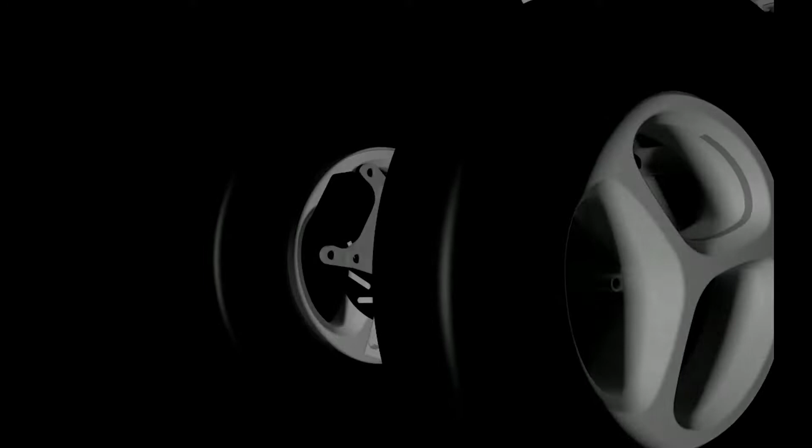Before we start, I would like to introduce what kind of personal mobility we tried to design. The target mobility should include 3 points: for active seniors in China, used in a first and last mile condition, as a personal mobility. The following presentation will be about how the industrial design team met these points in the actual design.

The concept of Purion Plus was all based on active seniors in China. Research with the customer insight team revealed that the activeness of seniors is pretty much restrained, and that they prefer something classic, not too iconic. They still have the desire to look cool and young.

They still have the desire to look cool and young, or the pure passion that Purion reflects, but at the same time it should be safe.

By making a positioning map for styling, we concluded that as the design form gets closer to classic, the vehicle becomes more stable than the iconic form. This indicates that the styling strategy of the industrial design team has to focus on restraining the form more than before.

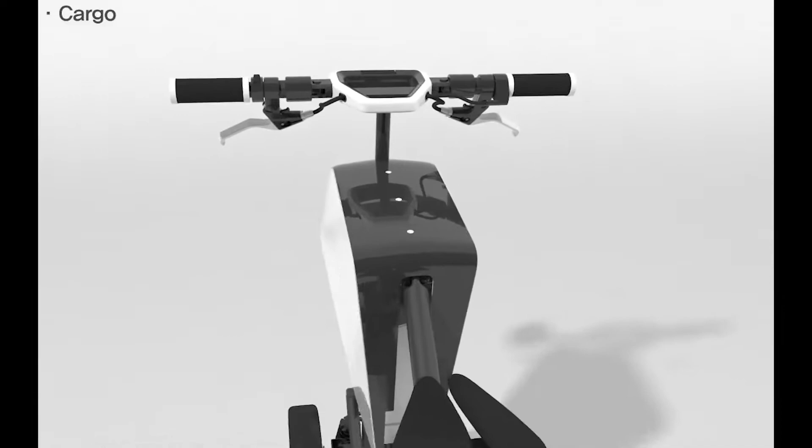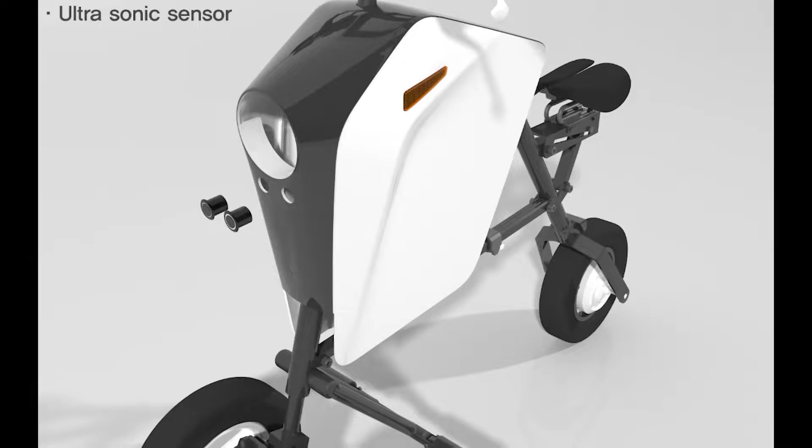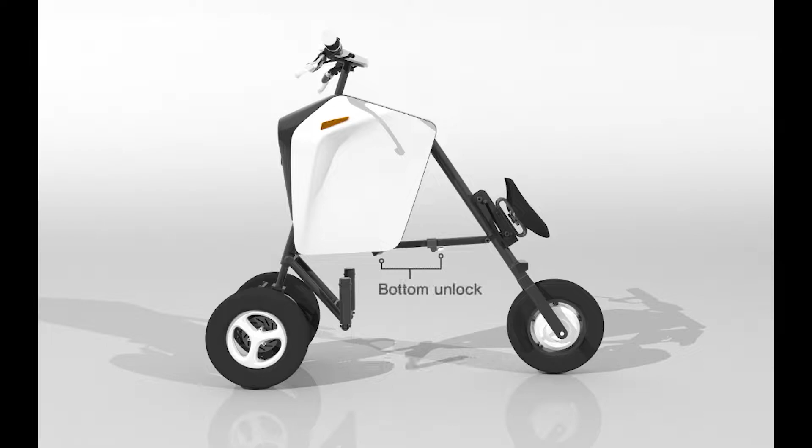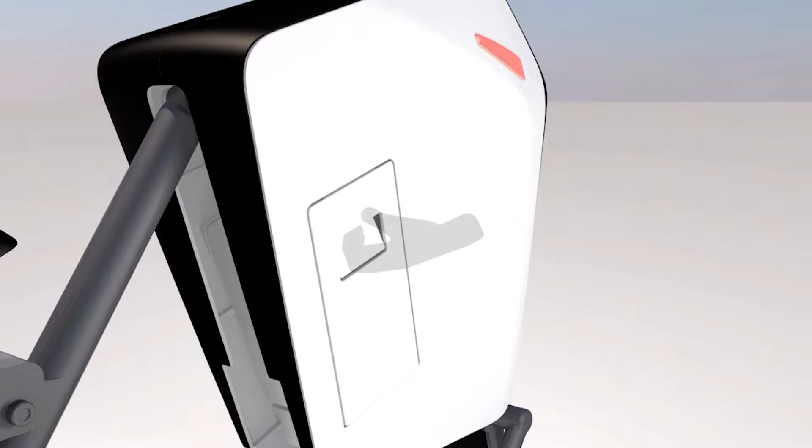Purion Plus is compact but functional. Its frame folds into half, and the cowl wraps its frame. It has a cargo on its right side. According to research by the customer insight team, it was revealed that customers usually felt the necessity of a cargo.

When folded, users can tow the mobility with the towing handle. The ergonomically designed towing handle makes the mobility portable.

Purion Plus is not just a mobility, it's a mobility for seniors. Therefore, in the instrument panel and the saddle, where the users directly meet with the vehicle, it should be ergonomically designed. In a busy traffic situation, users with degrading senses will feel that relying only on sight for acquiring driving information, such as navigation information, is pretty difficult and dangerous. Users will have to continuously look up and down to see the direction.

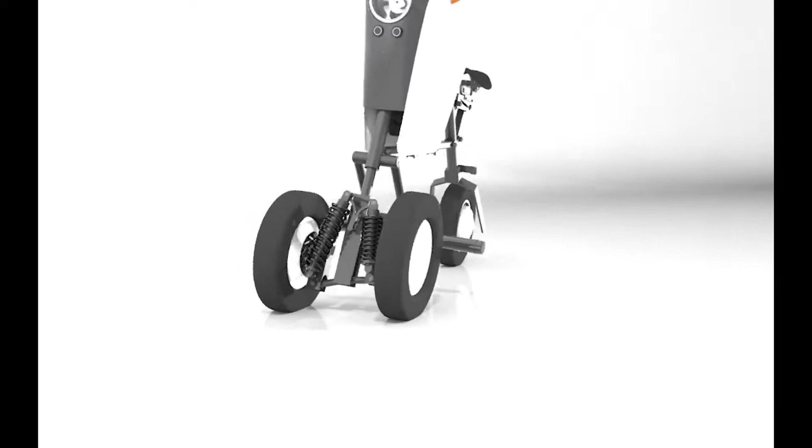Good afternoon, this is Ashley Cho presenting on behalf of Product Engineering of PACE Team 4. For the past few months, we have been collaborating as a team to enhance the specifications of Purion to Purion Plus in the aspect of engineering. Today, we would like to share what we have been working on with all of you. The contents are as follows.

First, the ergonomics. In the process of designing Purion Plus, the first thing we considered was setting the H point and finding an appropriate riding posture for users to feel comfortable. Therefore, we decided to do a mounting test on active seniors using a mock-up made based on the design dimensions. Video, please.

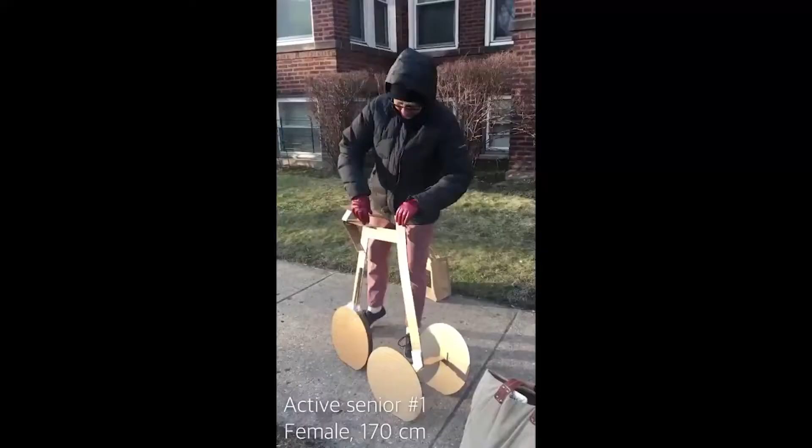The first mounting test was done by Northwestern University with the initial saddle height of 700 millimeters. However, all participants felt difficulties mounting onto the vehicle, so we decided to do another mounting test with modified dimensions of 560 millimeters. The results were satisfying, as all participants were able to mount onto the vehicle without needing to raise their legs above their waist.

The following products have successfully satisfied the given requirements, and they have been tested several times through sets of vehicle performance analysis.

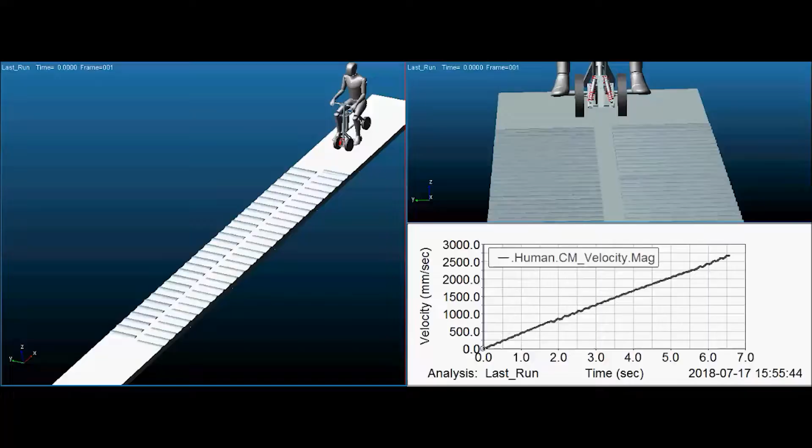Video, please. In the given conditions, we first did a ride analysis on a pocket road. As you can see in the video, we modeled the roads given by using Siemens NX and did a simulation using MSC Adams. With the damping constant set, the magnitude of the acceleration at the human center of gravity was measured to be at its lowest value when the spring stiffness was set to 250 pounds per inch.

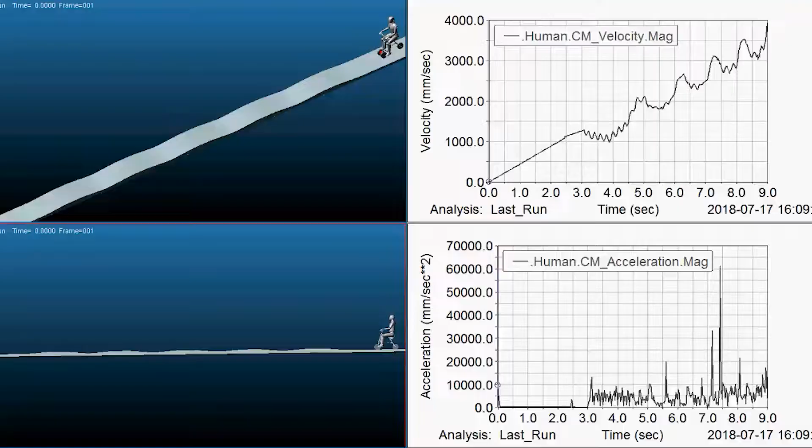Similarly, another set of analysis was done on slope roads with the equivalent spring stiffness of 250 pounds per inch. In such conditions, the magnitude of the acceleration at the human center of gravity was measured to be 6,222.3 millimeters per second squared.

Taking the result of case 1 into further analysis, we have then calculated the time required to complete one single driving scenario given by the PEMD road test.

By using the tread length of 300 millimeters, approximately 10 minutes was required to finish a single driving scenario, which definitely satisfies the given lap time given by the PEMD road test.

Last of all, as our host has greatly explained in the very beginning of our presentation, Team 4 has addressed an issue of the initial folding mechanism of year 1, and therefore we decided to move forward with another folding mechanism.

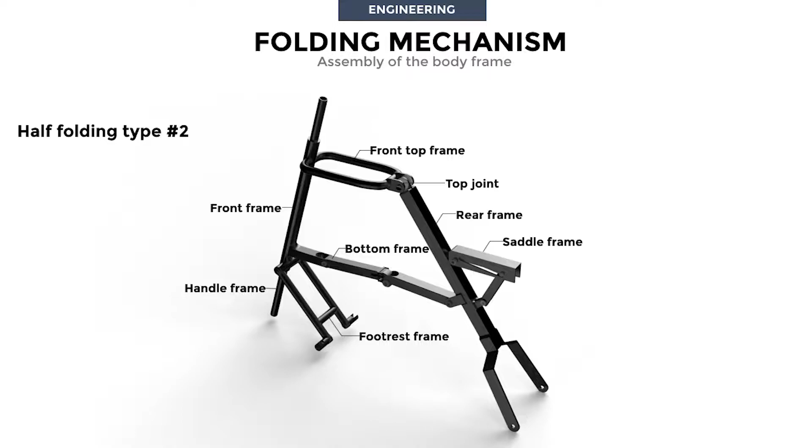Hello, this is Celine representing Northwestern University. The second design of the half-folding type relies solely on the bottom frame to be responsible for the mechanism, which means that it's also entirely responsible for the locking of the vehicle in riding mode. It is composed of 2 bottom frames for front and rear, a spring plate, sleeve, locking pin, and a cable.

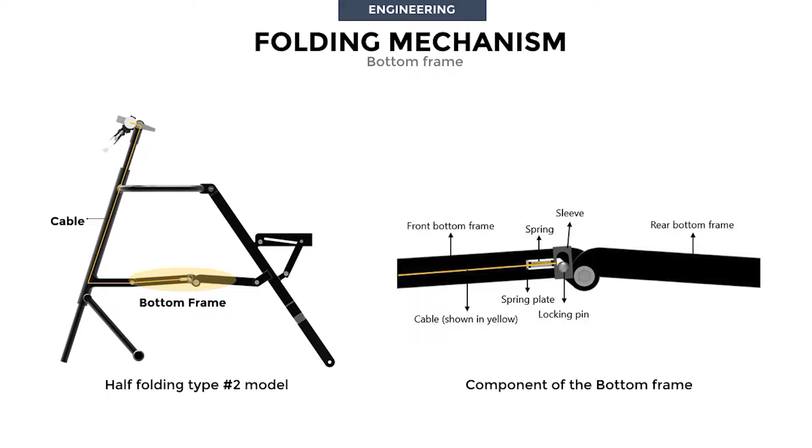The cable originates at the handlebars, runs through the front frame, and attaches to the sleeve. The design utilizes cable activation to disengage a pin from the locking mechanism, which allows the bottom frames to rotate and fold upwards. As you can see in this video, the travel of the cable caused by the folding of the handlebars pulls on the sleeve that moves the pin along a slot and out of the lock.

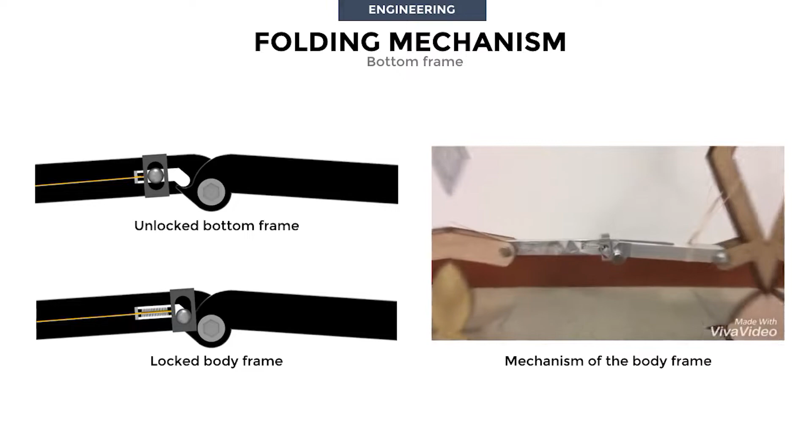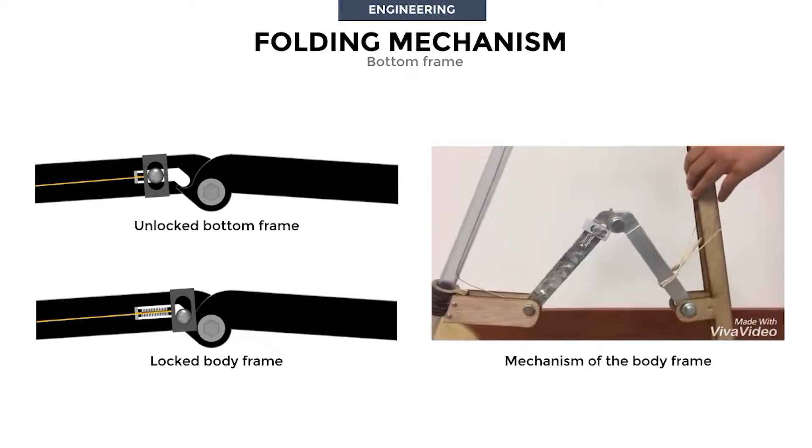The lock is simply a hook that is prevented from rotating upwards when the pin is engaged, blocking its free movement. To relock, the handlebars are returned to their extended position, which loosens the cable and allows the pin to be returned to its locked position by way of a spring pushing on the sleeve.

When you turn the handlebars, the cable is not pulled. But when you twist the handlebars like this, it is.

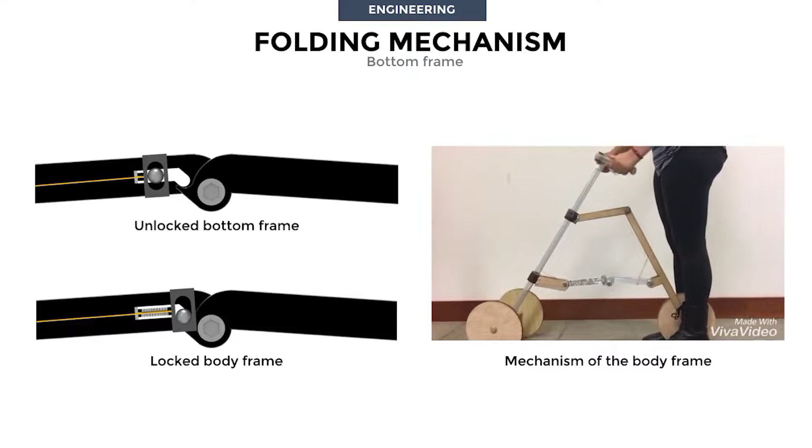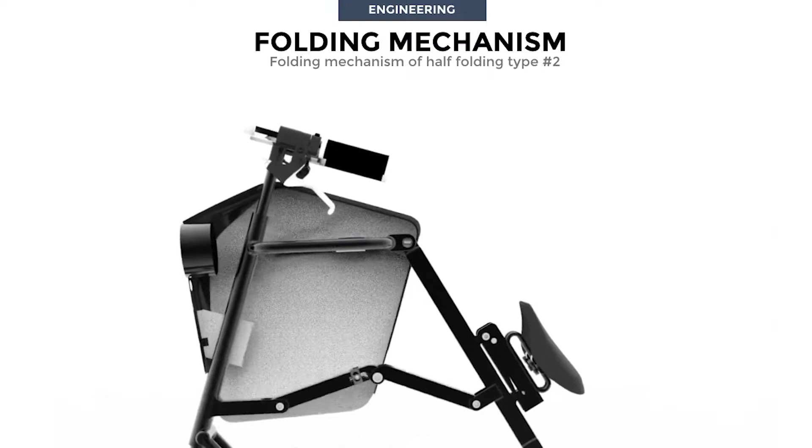Again, from the user's perspective, as seen in the animation, the user first folds the handlebars, which disengages the pin from the hook and allows the bottom beam to rotate. To change it back to riding mode, the user extends the vehicle and then extends the handlebars, allowing the hook and the pin to be engaged again.

The rationale behind this design was that, first, it is the joint that withstands the fewest directly applied loads and moments. The lock is designed to withstand 100% of the externally applied forces with a safety factor of 2, the industry standard. Second, because our target audience is older adults, we avoided placing user touchpoints that required uncomfortable movements, such as bending over or balancing on one foot. Handlebars are an easy location for users to access, as it's the highest point of the vehicle and where the hands are naturally placed. Cable activation was the mechanism that allowed the lock activation to be distant from the location of locking.

I'm very sorry for the inconvenience.

We've also collaborated with Tuskegee University regarding the structure analysis of the body frame. Hadia from Tuskegee will take over and present. Thank you.

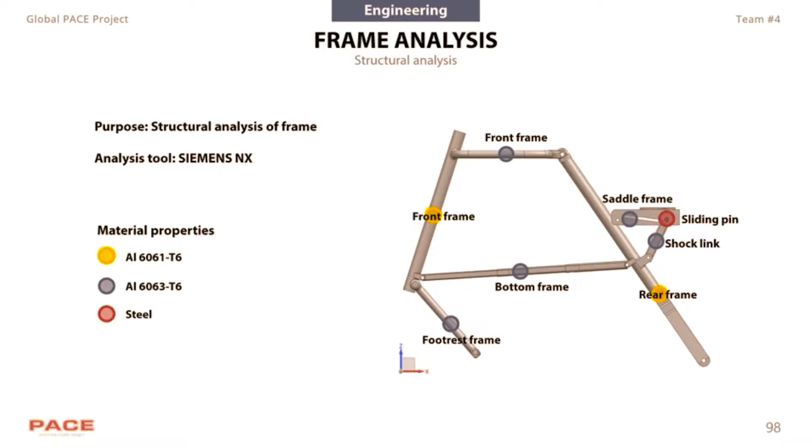We have distributed the total weight of a user of 95 kilograms in a ratio of 1:4 to the footrest and the saddle, respectively. By multiplying them with a safety factor of 3, we have applied the obtained load values of 2,234.4 newtons on the saddle and 558.6 newtons on the footrest. The loading conditions are indicated using red arrows in the presentation. To obtain a more accurate result, we have constrained the movement of the frames.

First of all, to regions indicated using blue arrows, we have applied a pin constraint, limiting the freedom of any translational motion. Also, a simple support constraint was applied to the front and rear frame, which is required to support the model's load. Additionally to the constraints, we have also applied a surface-to-surface gluing contact condition to the meshes in the yellow regions to join dissimilar meshes and enhance the results of the analysis.

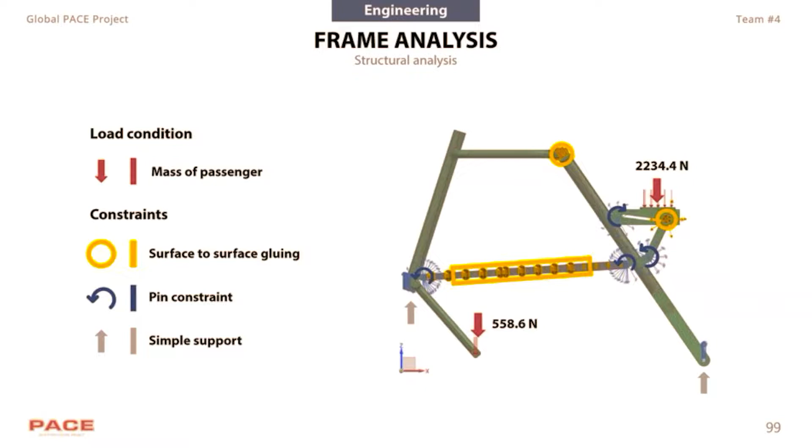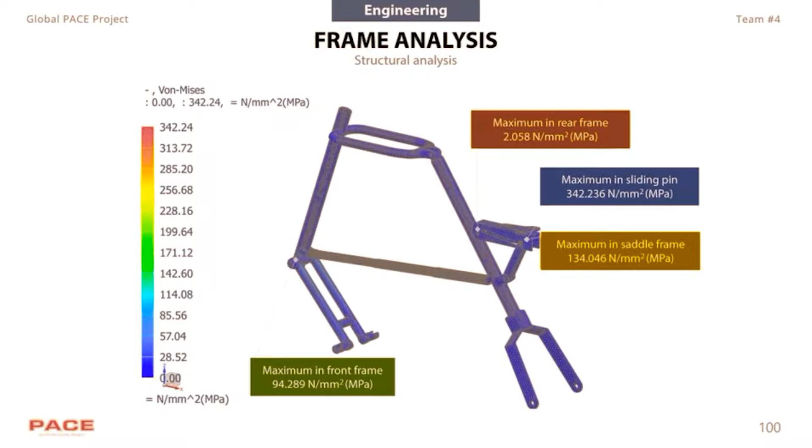This is the analysis result of the entire frame. The graph shows the maximum stress in each frame. For aluminum 6061, the maximum stress value of 94.289 megapascal occurred on the front frame. For aluminum 6063, the maximum of 134 megapascal occurred on the saddle frame, and for steel, the maximum of 342.2 megapascal was obtained in the sliding pin. However, since the yielding stress values of each material are higher than the obtained maximum stress values, no modification was required. As the analysis results suggest, we have concluded that no additional modification is needed in terms of improving the safety of the frame structure.

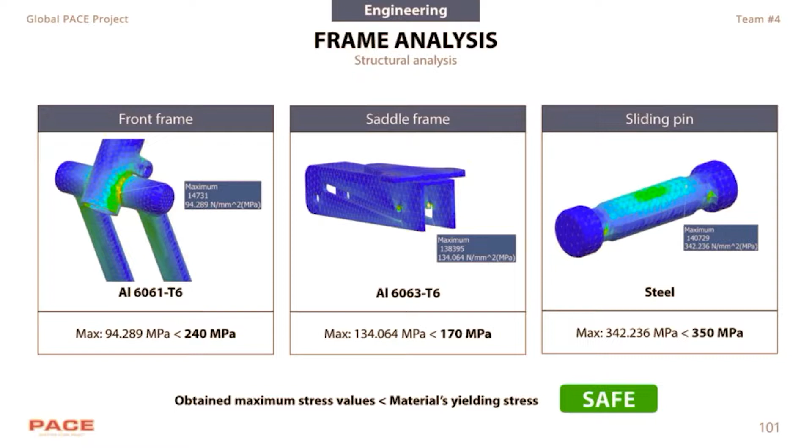This is Wang Bo-fan from Jilin University, and here is the thermal analysis of the battery set. In order to prevent battery degradation and reduce the possibility of battery safety issues, we have conducted a thermal analysis on the battery set to check if it's generating heat within safe range during charge and discharge. We have assumed the cylindrical area as our calculation area in accordance with the layout of the battery on the vehicle.

We have considered 2 cases of charging and discharging process. Considering that we have selected the general working condition of the battery pack on the e-bike, the following are the factors that will affect the heat generated inside the battery: first, the current, the charging and discharging current; second, the internal resistance of the batteries; and third, the room temperature.

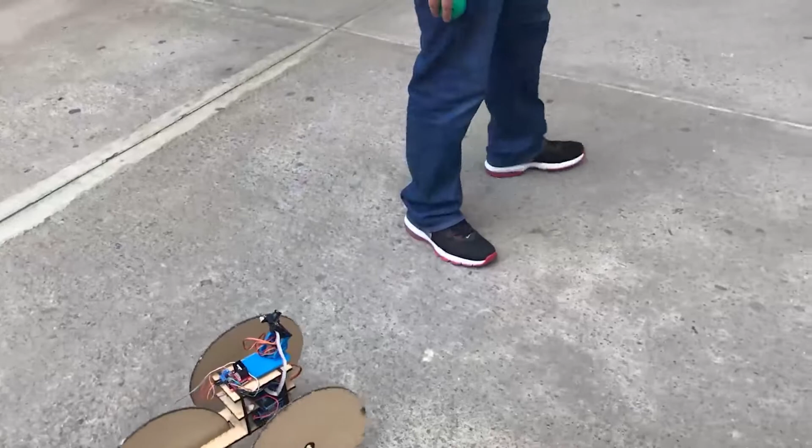We made a small mock-up to test the behavior of the system. The video, please. Okay, we can see our object to track is the green ball. We can see even with green in the surroundings, the camera only follows the ball.

And in the second video, you can see the collision avoidance system. Before crashing, it goes backwards.

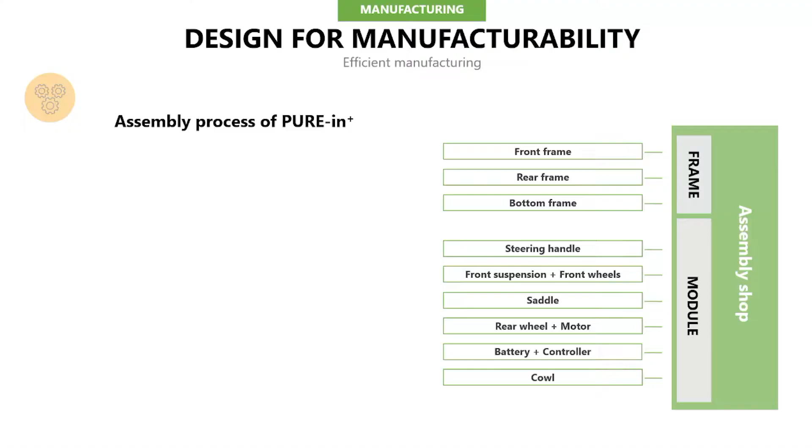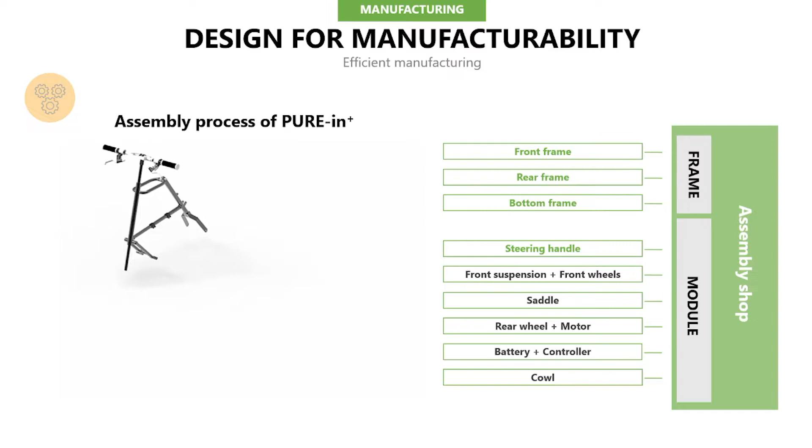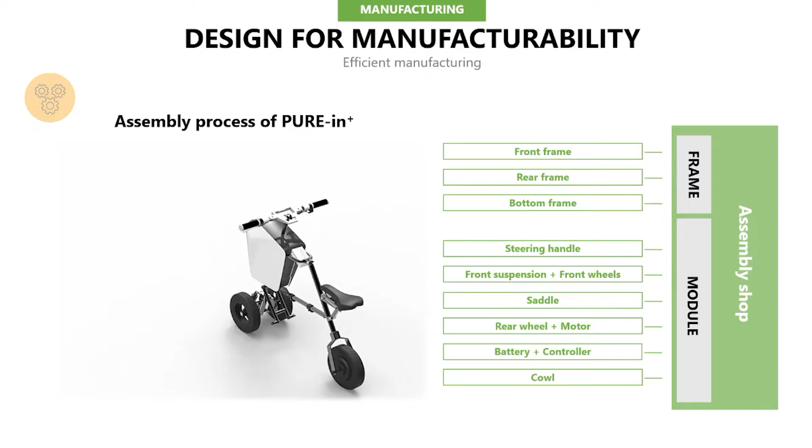Also, through sharing integrated product, process, and results information, all stages in the product lifecycle can share accurate information, not just isolated data of each stage.

Second is design for built-in safety. 60% of occupational diseases can be traced back to musculoskeletal disorders. A combination of physical and psychological factors induces the disorders. From a physical standpoint, the chairless chair which supports the worker's lower body, the exovest which supports the upper body, and the automatic adjustable height control system can prevent work-related injuries.

From a psychological standpoint, the working account system, health program, and eco-friendly workspace will provide a reduction of stress in the work environment. The industrial safety applications provide guidelines for a variety of risks and sound an alarm when workers go out of the safe zone. As a result, workers can always be aware of their safety.

Third is design for the environment. We will place the ion exchange scrubber next to the paint shop to realize green production. It has high efficiency, removing more than 95% of harmful gases while eliminating other emissions and reducing water and power consumption by up to 99% and 75% respectively.

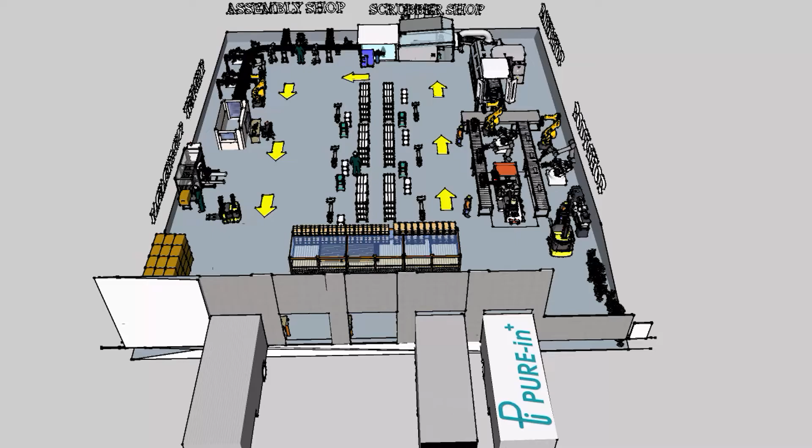This is our PURE-in Plus. As you can see, our plant is a U-structure process arrangement. When the production lines are activated by AGV, the processes of cowl and frame are performed simultaneously at the body shop. After that, they go to the paint shop.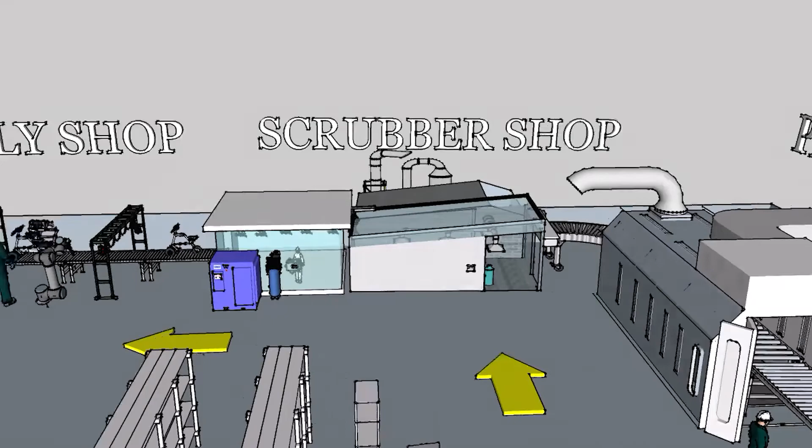Then the scrubber located outside sucks toxic substances coming out after the paint process. The frames and the remaining modules are assembled in the assembly shop. After the final test, they are packaged for distribution.

So this is our overall plant process. I'd like to finish here by thanking you all for your attention.

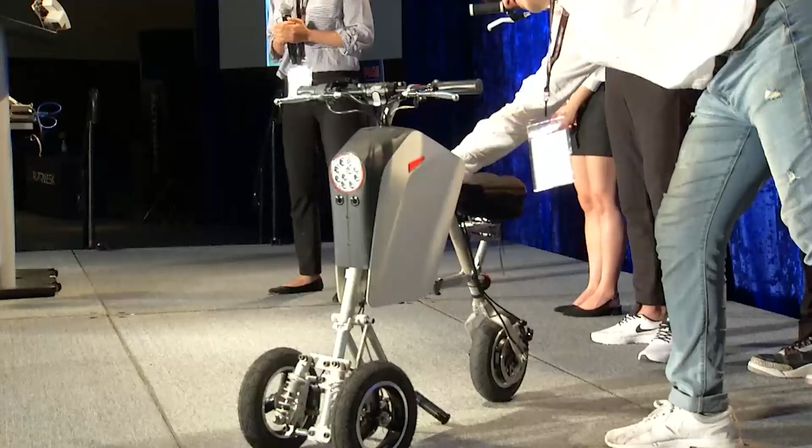Thank you. Let's give them a hand again. Good job, guys. Now we have a break, I believe. Where is Mario? We have a break, and we will finish the presentation after the break.